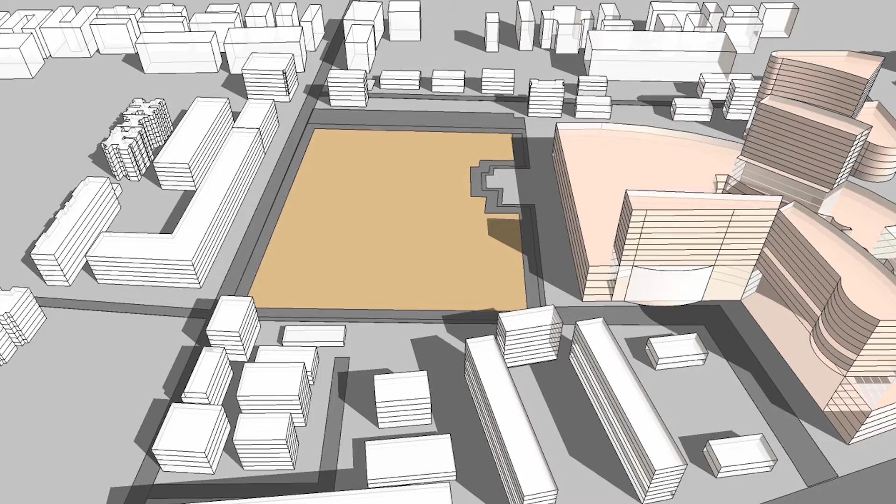The project is located in Pune, a Tier 2 city approximately 120 kilometers east of Mumbai. The site occupies an entire city block in length and has a height restriction of 40 meters, so we knew we were going to be creating a ground scraper typology. The other interesting aspect was that this large building was to be divided into very small allotments, tenancies down to as small as 250 square meters each.

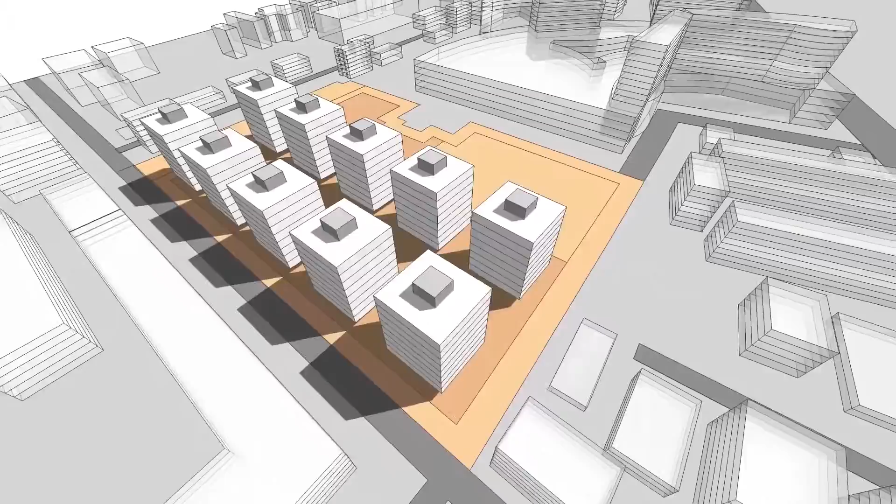Our first move was to explore different ways of applying the brief to the site, testing various design typologies and forms. At some point, we tried something very simple. We traced the outline of the site with a curved line, something that would give us the longest perimeter, maximizing our interface to the outside world in terms of form, light, and views.

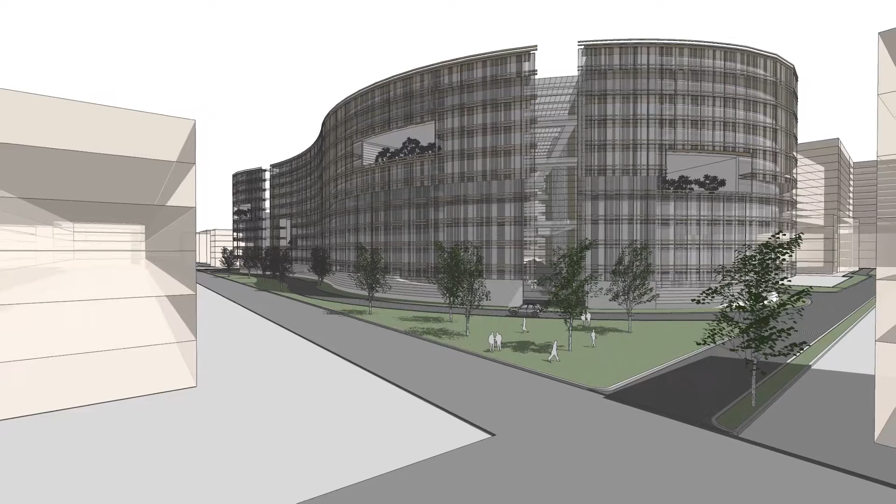This simple gesture was then explored in plan, computer imagery, and physical modeling. The design was then tested, challenged, and successively improved. The original 3 galleries that cut through the building were reduced to 2. The curvature of the envelope was rationalized, and the core and servicing elements developed.

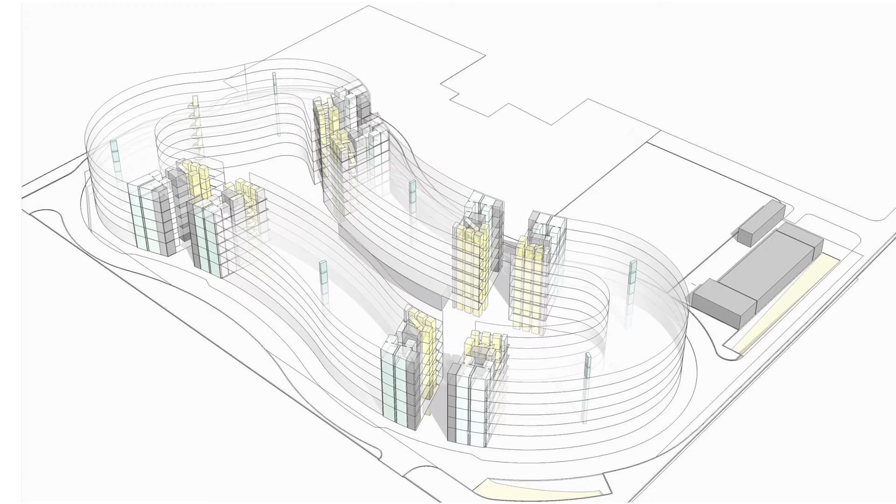Unlike a museum, where the architect can be less pragmatic about the relationship of geometry and practicality, in an office this is critical. We wanted to introduce as much greenery as possible into the design.

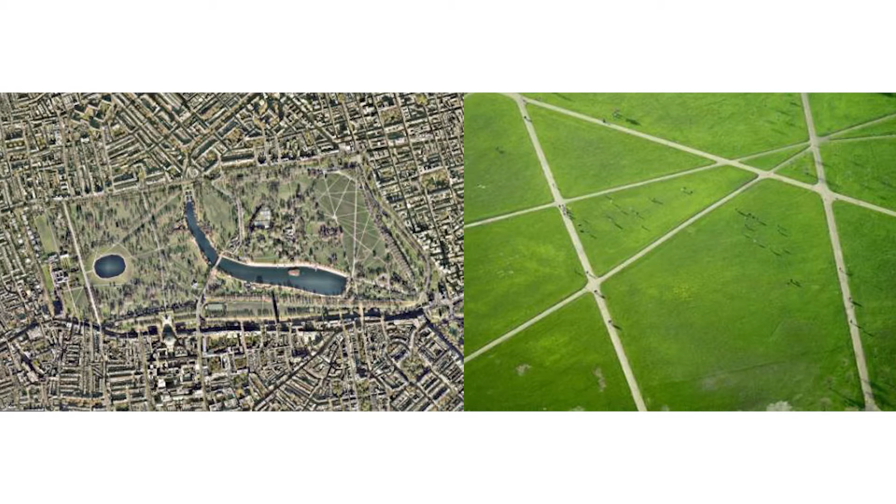Existing trees along the road and to the rear of the site were retained and designated as part of a park setting. The park at the rear of the site was to not only serve the office users, but to be accessible to all. To achieve this, we introduced what we called the Hyde Park Lines, a series of direct pathways that penetrate the building, connecting the city with the courtyard and beyond to the park landscape.

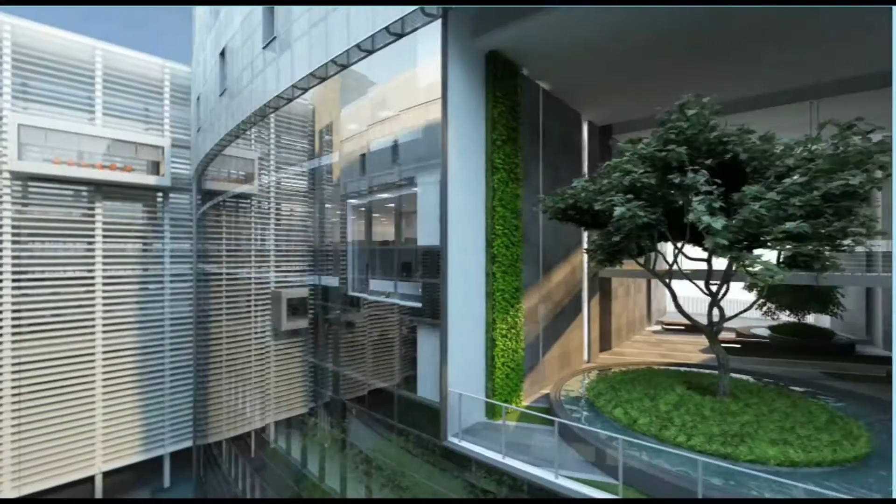Beyond the ground plane, we also created sky terraces, large voids penetrating the building, providing naturally ventilated, heavily landscaped breakout spaces. This vertical greening culminates at the top of the building, where we pulled back the envelope to half of the floor plate depth, creating a continuous strip of landscape terrace.

The client brief to house lots of different small-scale tenants in a very large office complex challenged us to rethink the way this kind of office could work. In this next sequence, we show how, behind the simple external appearance, lies a highly complex array of functions.

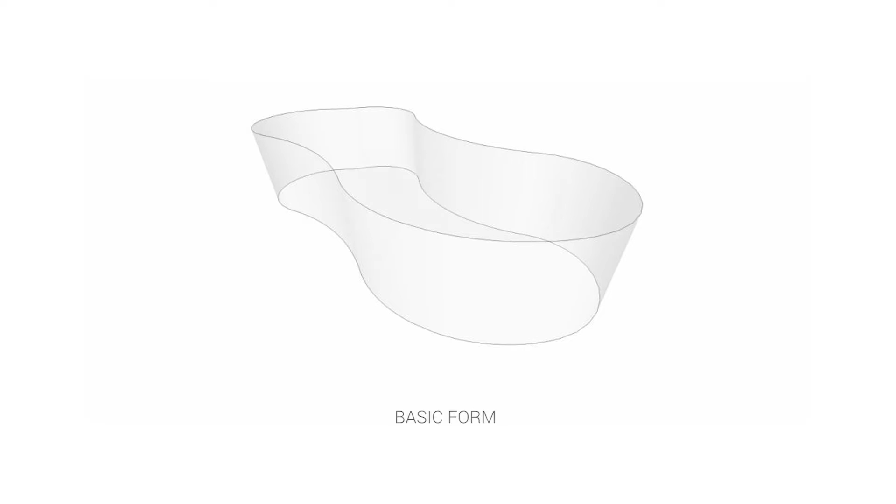The organic form is first hollowed out to create a courtyard. Two galleries cut through the building, giving rise to decentralized cores. And finally, large multi-story voids are embedded into the form.

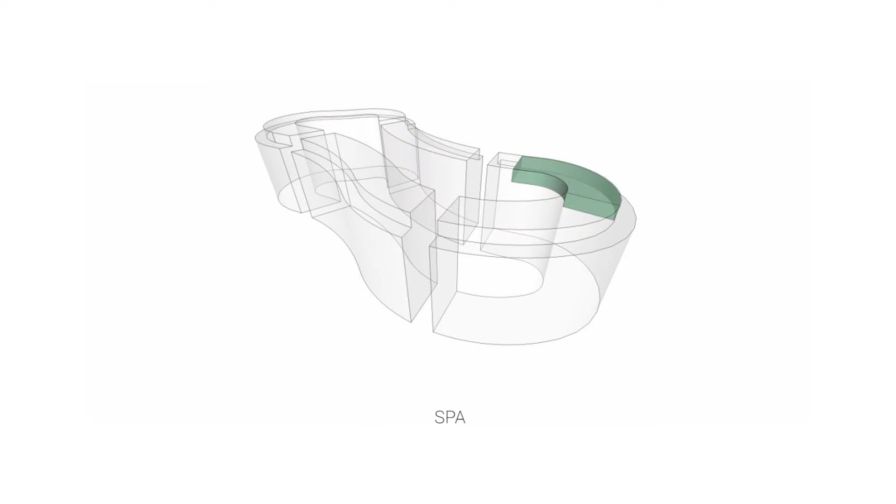Beyond the offices, there would be sky gardens, rentable meeting pods, retail, F&B outlets, a boutique hotel, a gym, a spa, and a roof terrace bar and restaurant. All of these facilities form the basis of what we call the condominiumization of the office, an environment where access to a plethora of common facilities is offered to all tenants.

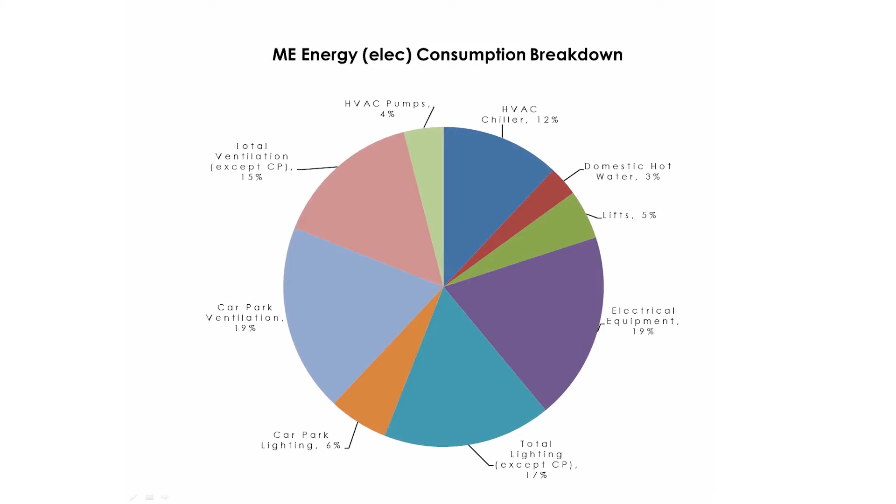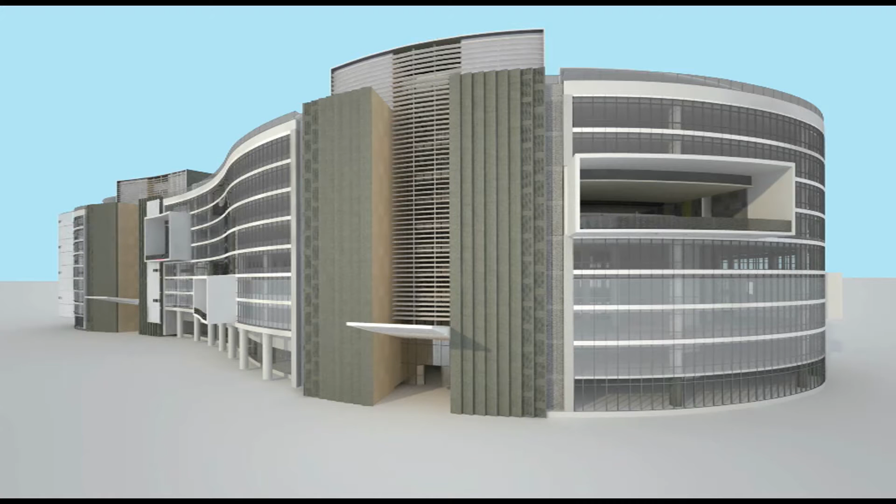Studies were undertaken to explore how to achieve the most efficient building envelope, resulting in an interesting, multi-layered facade, starting with a double-glazed, high-performance curtain wall. Beyond this is a series of terraces that allow most of the tenancies to have an outdoor space, directly accessible from the office. Finally, we wrap the building in a veil of perforated metal, a screen that cuts out 40% of direct solar gain, reduces glare, and still allows for a direct visual relationship to the outside.

I'll be the first to admit that we had a lot of fun designing this building, exploring in 3D, thinking through the different building systems, and working with models to better understand space, light, and composition. This also meant communicating our ideas to the client and his team during many visits and working sessions.

As the design came together, we did this short animation that captures the spirit of the design. In a city of straight lines and boxes, Marvel Edge cuts a very different profile. It stands out in form, function, and materiality.

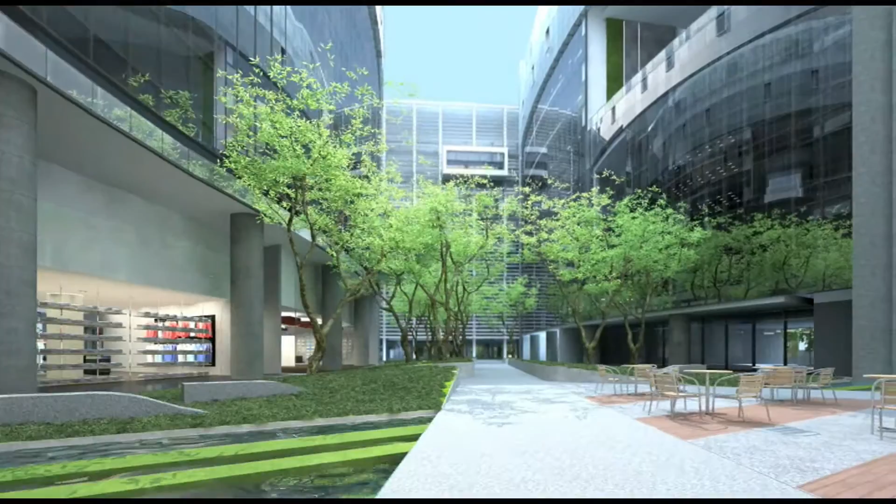This video shows very clearly that this is not just about a sexy shape. It's about providing a better working environment, exciting facilities, spaces, and experiences. As I always point out to our clients, we are not in the business of selling drawings. We're in the business of making buildings, the process of translating our vision into reality.

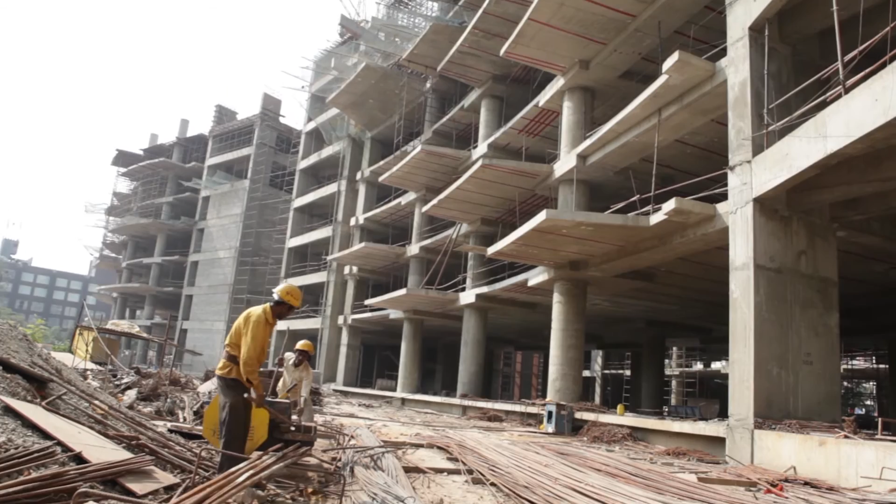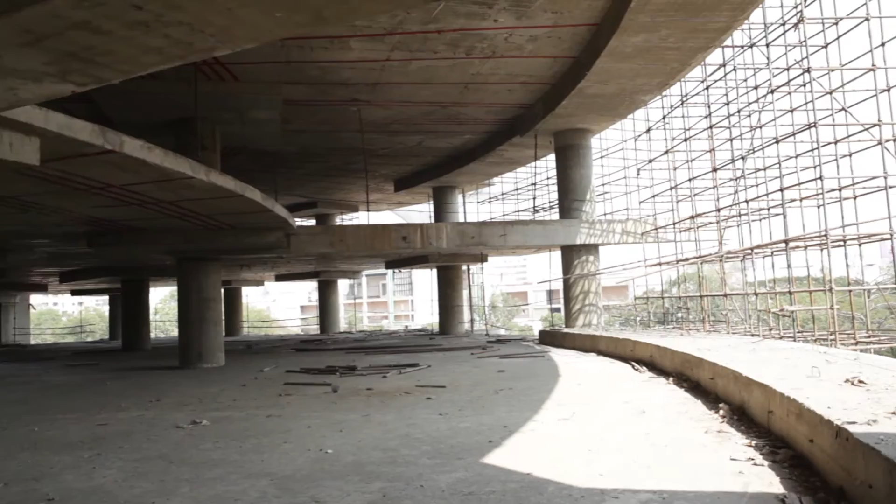This involves countless visits to the site, working with the client, consultants, specialists, and coaxing the design through the challenges that conspire to dilute architectural ideas. It's exciting to see the form taking shape and rising out of the ground.

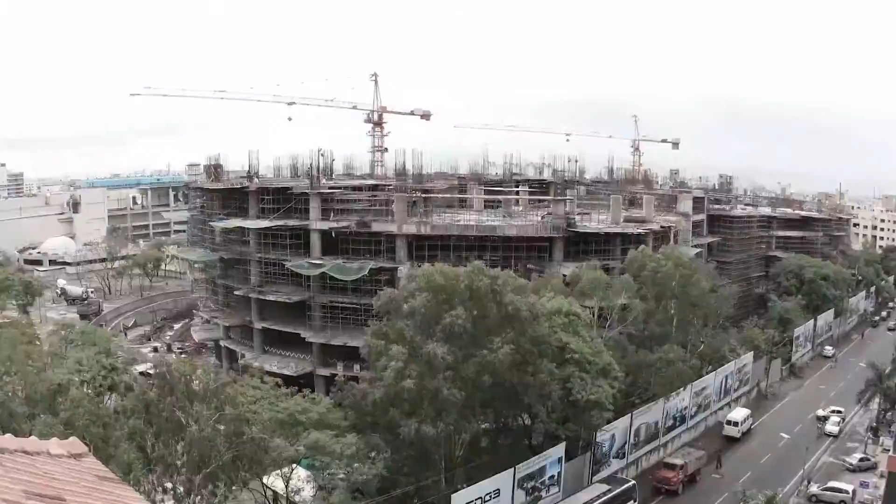This time-lapse video compresses almost 3 years of construction into about 15 seconds, which makes light of all the time, effort, and struggle that goes into creating a building like this.

Now in 2014, 6 years after my first meeting with the client, the first phase is completed, and tenants have started moving in. Marvel Edge is our first completed building in India, with many more to come. It has been a great journey, and the most satisfying part is finally seeing what has gone through our extensive gestation period and design process finally coming to fruition.